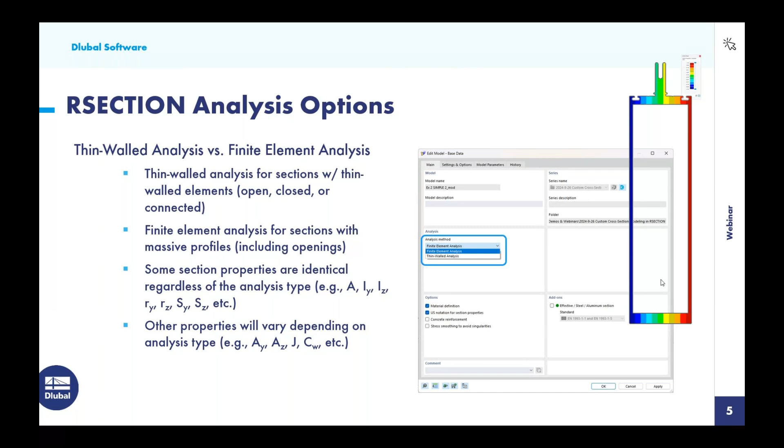Now, in addition to generating what we call the part, we are also required to generate what we call the elements. This will make more sense as we get into our example models today.

With these elements, we apply simplified assumptions and analytical formulas. The stress and force flow is considered along these simplified elements' lengths, but not their widths. So topics like the shear, torsional, and warping properties are going to reference those elements only - we're not able to take into consideration the full cross-section geometry here.

For example, we're going to simplify and maybe exclude the fillet radius for some of these cross-sections.

Now, this next point I really wanted to emphasize: when we generate these elements with this thin-walled analysis, and we bring it into RFEM for the full analysis and design, we are able to carry out the local buckling checks of these custom cross-sections according to the ADM standard, the AISI, and the CSA standards. This is something that is very unique to RSECTION in comparison to a lot of other competitor programs for calculating cross-section properties - again, we can take it this step further to carry out the local buckling.

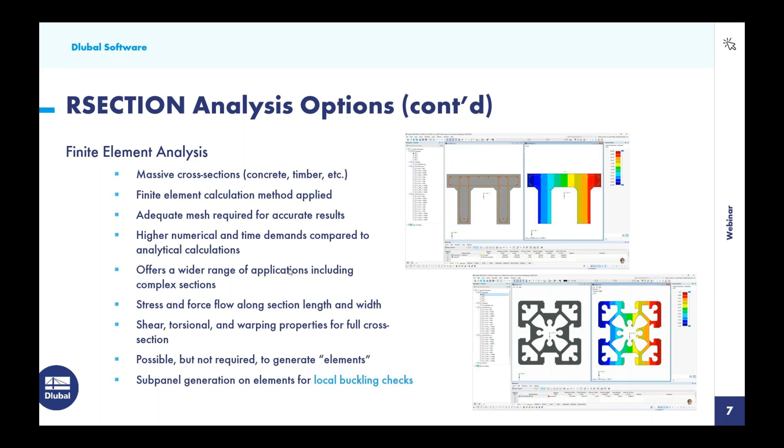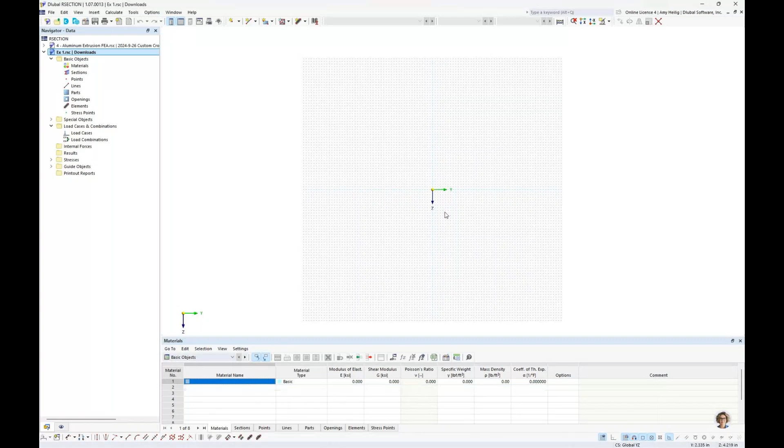So let us begin in RSECTION here. When we go to create a new model, we would give it a model name, and as mentioned in the PowerPoint, we would want to choose the analysis method. For this first example, this will be a built-up hot-rolled steel section that we will carry out according to the thin-walled analysis. Once we have input this information, for those of you familiar with our other program, RFEM 6, the interface looks almost identical. We have our navigator on the left, some tools at the top, modeling tools at the bottom, and a table to work with. Here at the graphical interface, we'll begin to create our cross-section.

I'm going to right click over in the navigator to create a new section. What we have here is the ability to access our cross-section library, so all the standardized sections from the various standards are included, as well as some parametric sections. We want to begin by accessing a W shape, and over on the left, we're going to use our filters to set this to the United States. We also set this to the AISC 16. We choose the W shapes here, and then we will scroll down to choose a W30 by 99.

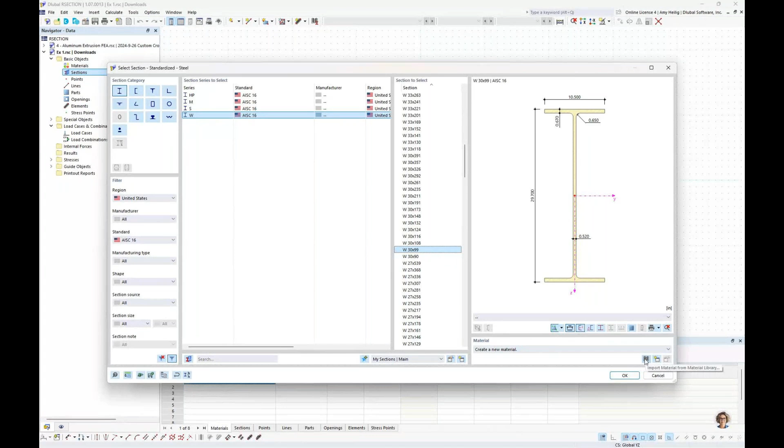Now we do want to assign the material to the cross-section, so very similar to the cross-section library, we're going to access our material library. Again, utilizing the filters on the left, we're going to choose steel, and then we can select the AISC 360, the latest 2022 standard. Here is where we can go ahead and choose the A992 material, so now this material is assigned to this cross-section. Once we have defined this particular section, we can choose a point here where we would like to insert it within our model. I'm going to take this top point and select it, and it's going to be automatically inserted here at the origin. I click OK, and now we see this standard W shape shown here.

Now we do want to add a channel cap to this.

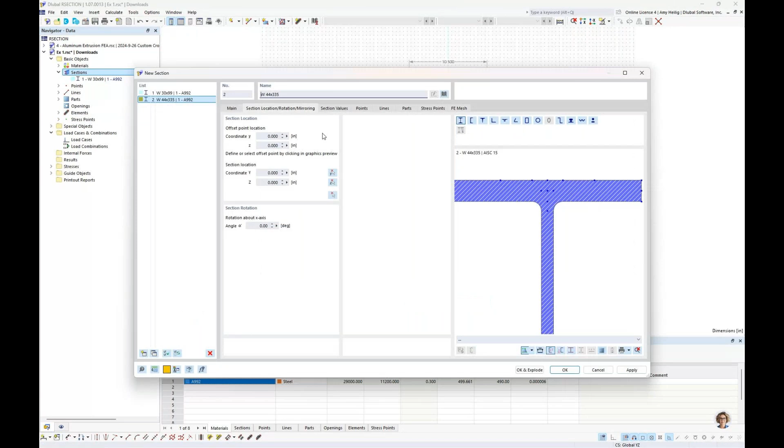So I'm going to once again right click to create a new section. We do have some quick sections we can access along over here on the right where I can choose a channel section. Once again, setting my filters to the United States, I'm going to choose the AISC. And then for my channel section, we will choose a 15 by 33.9.

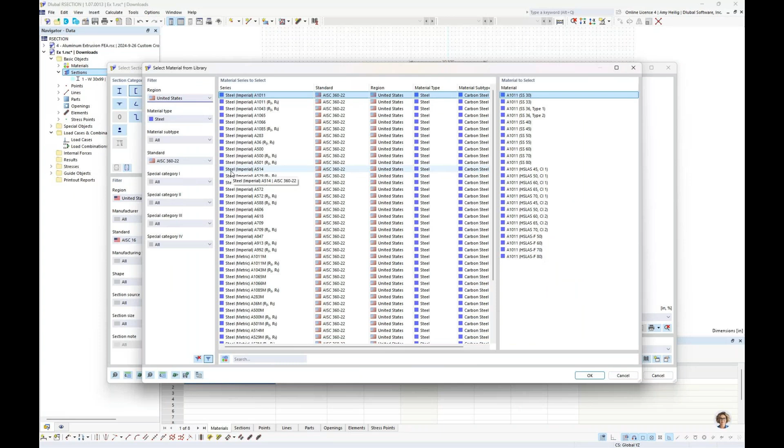We do want to assign a new material to it, so we're going to access our material library. This time we will choose an A36 material to assign to this particular cross section. We click OK. Now we want to rotate the cross section 90 degrees.

Again, I'm going to select a point here where I would like to insert in the model, not necessarily at the origin, but this time I'm just going to zoom in here and choose a point above the W shape. So when I click OK, we clearly need to move this cross section down to the top of the flange.

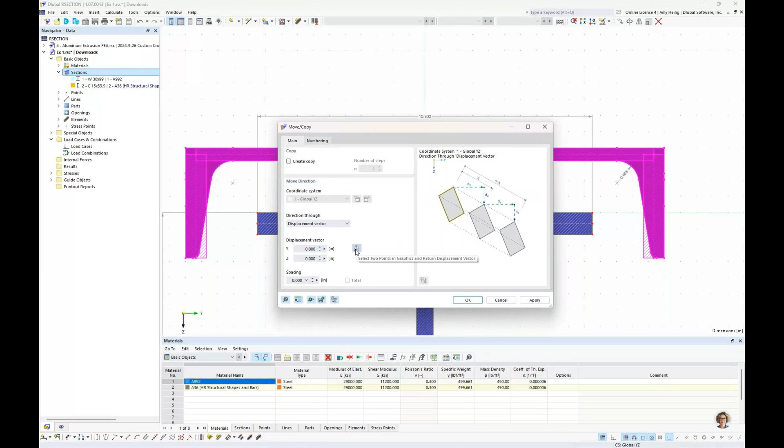We can easily do this by highlighting the cross section entirely, using our Move Copy tool. And I can graphically select my displacement vector by choosing 2 points. So I'll select here the point at the bottom of the channel, and then at the top of the flange will be my second click.

But I don't want to move this in the Y displacement direction, so we'll go ahead and set this back to 0. We're only going to move it vertically in the Z direction. And now we can see that these two cross sections align well for our built up section.

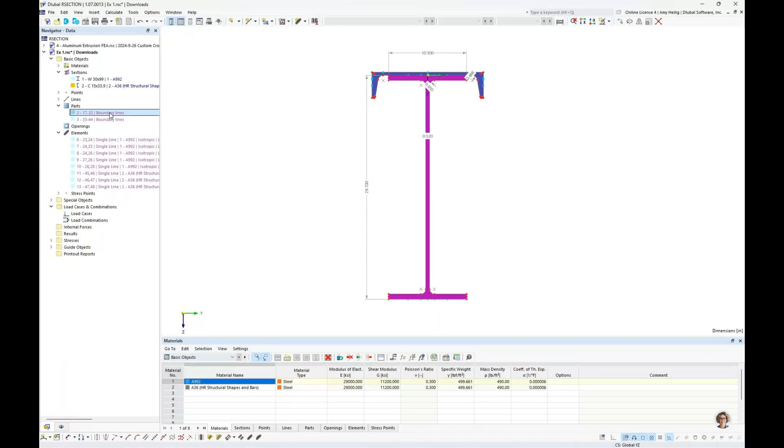So let us talk a little bit about the parts versus the elements. Because I have brought in this cross section from our section library, all of the parts and elements are automatically created here. I'll go ahead and hide the elements just to explain what we call the part. So the first part is our W shape, and we're just simply utilizing the boundary lines of this cross section, assigning the material to create that first part.

Our second part here is going to utilize the boundary lines of the channel, again, assigning that A36 material. Now, if we go ahead and graphically turn off the parts and turn back on our elements, again, these elements are automatically created and they are required when we run a thin-walled analysis. But again, you can see that all of them are listed here in our navigator.

Now, this is the information that would be taken into RFEM eventually and allows us to carry out those local buckling checks because we can tell which elements are supported at the edges, both edges versus just one edge. We know the thickness, we know the width of them, but you can see that there are some simplifications made with these elements. For example, we can't take into account the radius here of the channel or the radius here of our web to our flange connection.

But if the shape is close enough, then this should be sufficient for calculating the shear, warping, and torsional areas, and the thin-walled analysis would be preferred. But as the cross-section deviates further from the elements, this is where we would want to move to a finite element analysis.

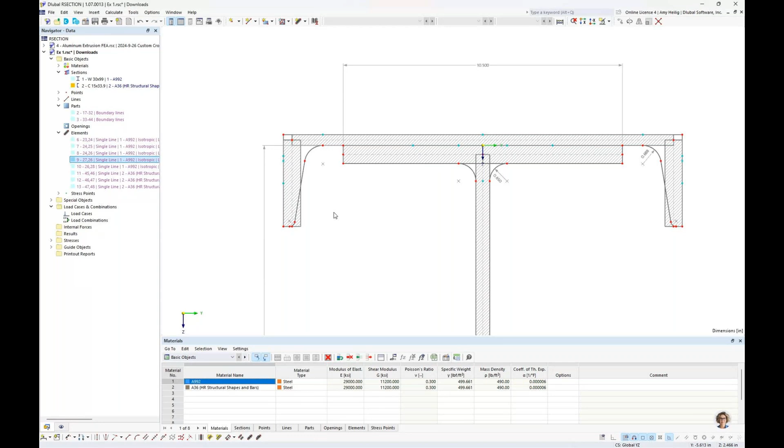Now, if I were to go and run the calculation, I go to calculate, calculate all, I get a warning. And it's telling me that I have several unconnected parts. So this is quite common within RSECTION.

And the reason why is because all of these elements here need to connect at their center point. And the issue is going to be this top element here with our channel just sitting on top of the top elements here for our flange. These are technically not connected.

So what we need to do is to create what we call a null element. Now, in order to make modifications to this cross section that I brought in, I need to select both of the sections in my navigator here. I can right click and I can choose the option to explode.

So now I can make manual modifications to these cross sections. Notice the elements I can now select individually. I'm also going to right click here to ensure that this auto connect lines and elements is turned on. As I draw elements, the program will automatically divide up additional elements that it intersects with.

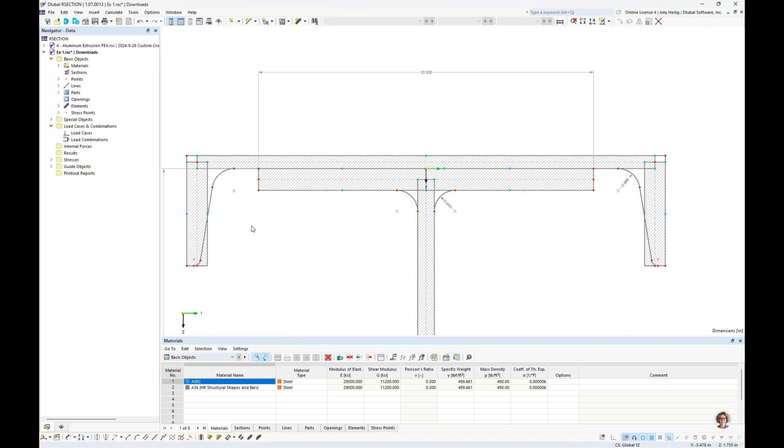So we're going to begin up here by drawing a new single element. Now, I don't want this element to have any thickness. It's a null element. So we can zero that out because I don't want to affect the cross-section properties. Rather, I'm going to define here the effective thickness for shear transfer.

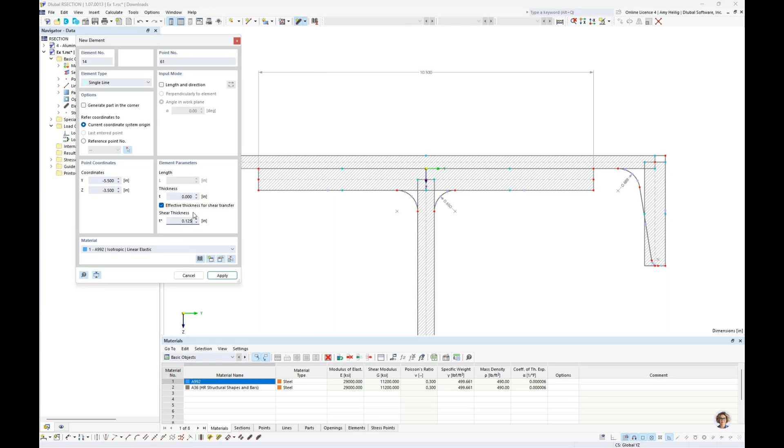We can set this to something equivalent to the thickness of the weld, for example, 0.125. We input that in, and then we can snap to that center point of the flange to the web of the channel here, right at the center point, and my null element is generated.

I right click once, and I want to do the exact same thing over here on the other side, snapping to the center point up here at the center of the channel element. Right clicking a couple times, you'll notice this element again was broken up where we added that additional null element. The null element can also be seen here in our navigator. Again, it's not adding anything to our cross-section properties; we're just connecting those elements with that shear transfer thickness.

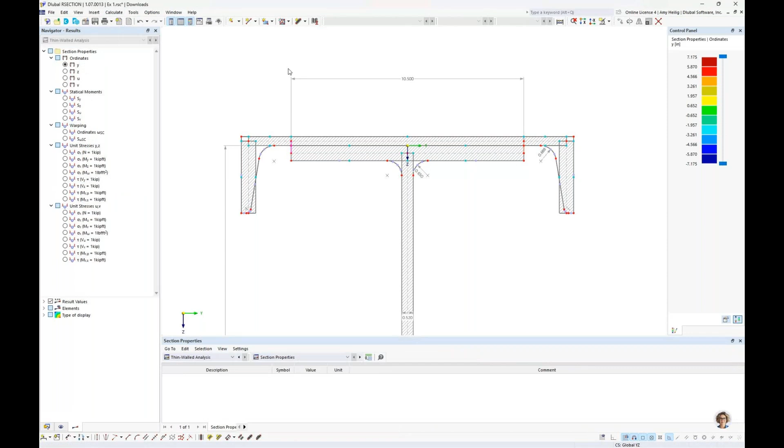So now we are ready to run the calculation. If we go to calculate all, we see how quickly that solves, with no warning messages. Ultimately what we're after here in our table results is the cross-section properties: area, moment of inertia, and some properties specific to the thin-walled analysis calculation like shear, torsion, and warping. This information is certainly what we need to also bring into RFEM.

We would want to save this file with the results by going to File, Save, or Save As. You need the saved results to bring this into the FEA program RFEM. But in addition to the table results for the cross-section properties, you'll notice some additional options to view graphically here.

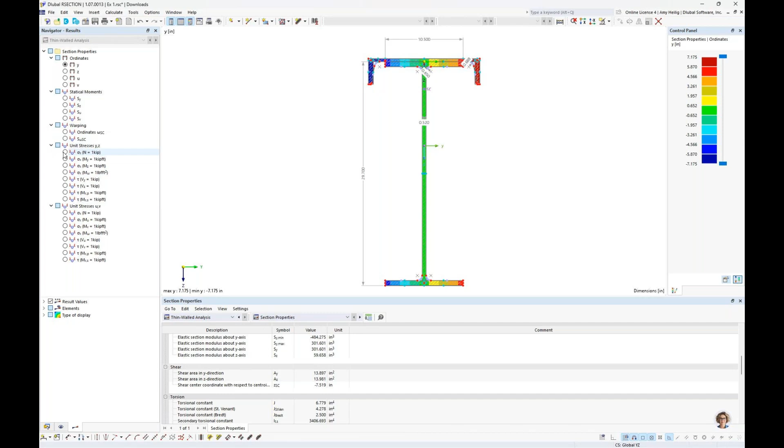The program will actually give you the stresses based on applied unit loads. For example, I can view the stress based on an applied axial force here to the entire face of this element based on 1 kip. We see 25.5 psi, or maybe I want to take a look at an applied bending moment of 1 kip-foot. Again, we can view the relevant stresses.

Now it also might be interesting for us to view the stresses on the cross section for loads other than this standard 1 kip or 1 kip-foot. We can also do that directly within RSECTION without bringing it to RFEM necessarily.

You'll notice over in our navigator that we have the ability to right click to create a new load case, and we can create as many load cases as we want. We could even generate a load combination with the relevant load factors. For today's example, I'll just give this a single load case name, load 1.

I click OK, and once we've created this load case, we can apply forces by right-clicking on the internal forces and selecting new internal forces. You'll see the relevant forces we can apply to this cross-section. For example, if we wanted to add a shear force of -10 kips, we put that in for VZ. If we wanted to apply a bending moment about the strong axis, we could put in 100 kip-feet.

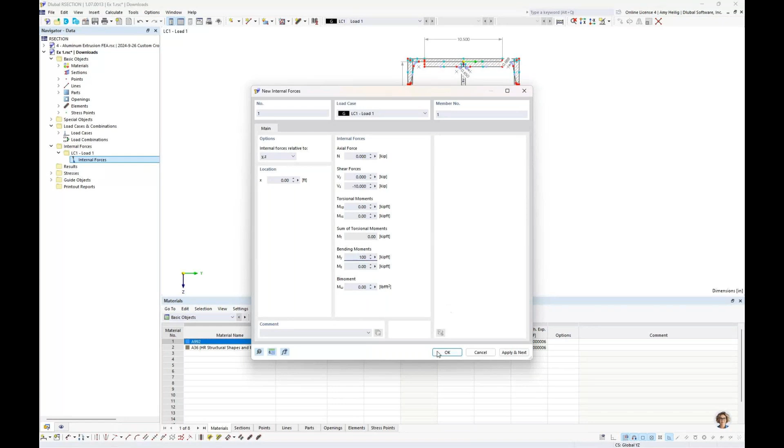So when we click OK, I can go back to calculate all. All of my cross-section properties, of course, remain unchanged, but now we get this additional option in our results shown at the bottom where we can view the normal stresses, shear stresses, or von Mises stresses, based on that applied shear and bending moment from load case 1.

All right, so that will conclude our first example for today. We now want to move on to our second example.

So for this one, I am going to jump over here to my AutoCAD file. I have this relevant cold-formed steel section shown here. Although the shape is a little bit more complex, you'll notice that the thickness of the wall is identical throughout. So this will certainly be very user-friendly to import into RSECTION because of this.

So we will go back to RSECTION here, and we're going to create a new file. We're going to give it a name, example 2, and we want to carry this out again according to the thin-walled analysis. We click OK, and once we have our model, we can additionally go to File, Import to directly import that DXF file.

So I'll go ahead and select the saved DXF file. We'll import into the active model, and now we get some additional options for what we want to do with this DXF file. Because this cross-section has a pretty uniform shape for the thickness, we can automatically create both the elements and the parts.

So let us go ahead and do this by selecting the second option here to create the elements automatically. We do need to put in the max thickness. This doesn't need to be the exact thickness, just a number anywhere greater than the thickness, because the program is intelligent enough to create the relevant element widths.

As far as the part, we do need to assign a new material. So we go into our material database, and instead of selecting from the AISC, we will select from the AISI standard. We'll go ahead and select this cold formed steel material listed first, the A1003-15. We see all the relevant submaterials as well. We'll go ahead and select the first option.

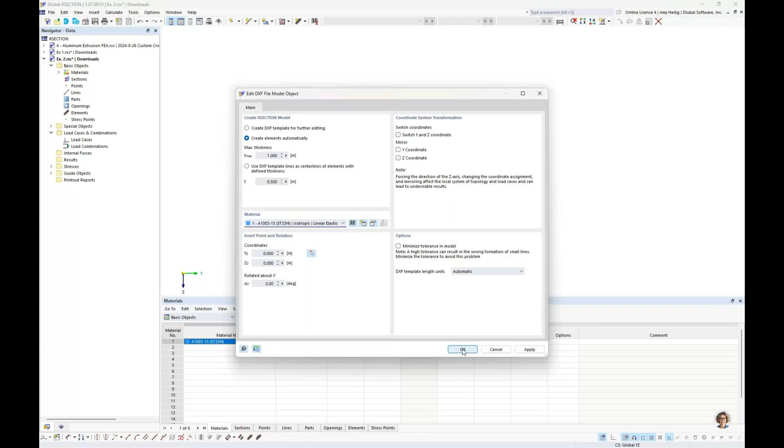So when we click OK, the program will go ahead and import that DXF file, and we'll see that everything is automatically created for us. So you'll notice here, if we expand the elements and the parts, everything was generated from that DXF file import.

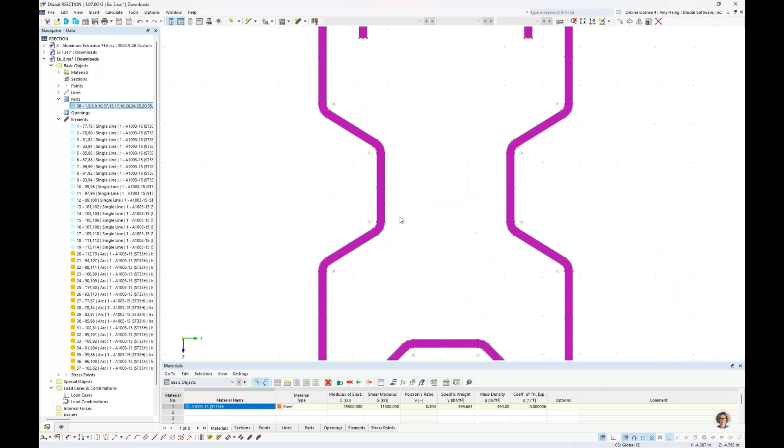So I'll go ahead and hide the elements for now. If we take a look at the single part that was created, the program just detects what the boundary lines are here. This part is absolutely needed no matter which analysis type we're selecting, because it's going to be used to calculate the cross-section properties like area and moment of inertia.

But then, because we are carrying out the thin-walled analysis, these additional elements are required. So I'll go ahead and turn off the part, and we'll turn on the elements. You'll notice that this was a pretty easy application, because the program is going to generate all of these elements automatically.

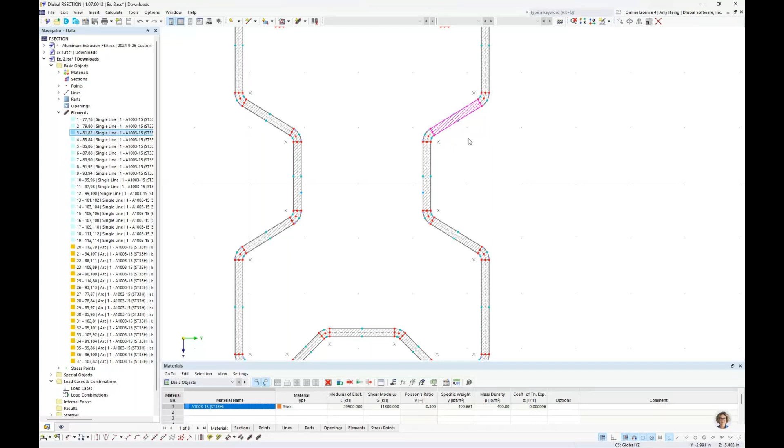This is what's going to be used for local buckling checks once we bring this into RFEM, to determine the length-to-thickness ratio, where these elements are supported at both edges, as opposed to this one up here that's only supported at one edge. You'll also see that we have the ability here to generate arc elements, so we're not restricted necessarily to just a straight segment.

So really, that's all that's needed for this particular section. If we go to calculate all, you'll notice that once again we have all of our cross-section properties given to us based on the thin-walled analysis within table format, as well as those unit stresses based on those applied unit loads. We would save these results, and then we could bring this over into RFEM.

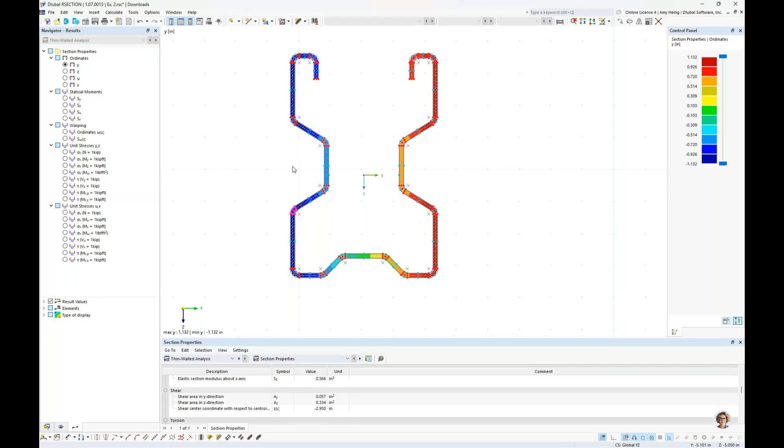So this cross-section was fairly easy with the DXF import. We'll now move on to our third example. For this example, I'll go back to the AutoCAD file here, and this is going to be for an aluminum extrusion. Now we see here it resembles pretty much a box section, but this certainly has some more complexities up here at the top than our last example.

A lot of these elements are going to be different thicknesses. We have notches, we kind of have these openings and grooves. So let us see how we can take this DXF file into RSECTION to still calculate the cross-section properties. So once again, we will go to File, New to create our third example.

Now, this analysis method is going to be set to the finite element analysis. I mentioned in the PowerPoint that although we would prefer the thin-walled analysis for something like an aluminum extrusion, at some point when the cross-section gets a little bit more complex, we do need to move to the finite element analysis. So this example will explain a little bit further why we will carry this out.

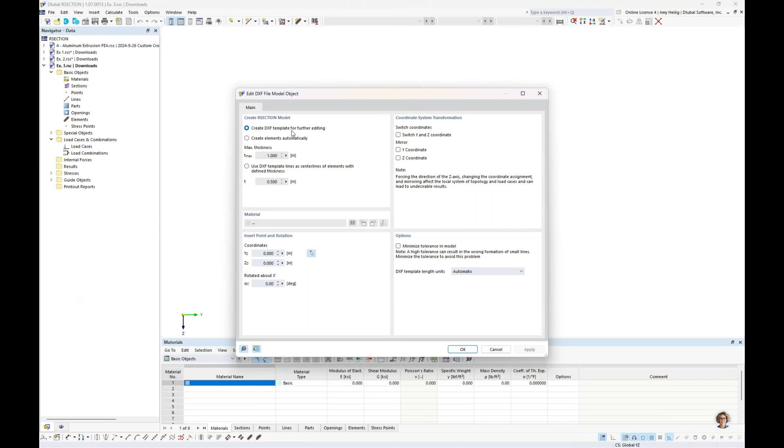So we click OK, and we're going to go to File, Import, to bring in the DXF file once again. We select this file from our computer. It's asking if I want to import it into the active model. Yes, we do. But this time I'm not going to create the elements and the parts automatically. It is possible, but the elements don't come in so nice because this cross-section is a little bit more complicated. So instead, we'll choose the DXF template for further editing, and I click OK.

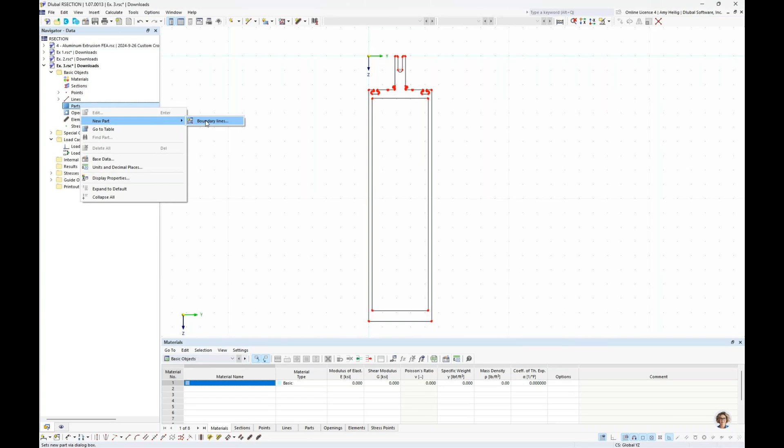So now what you'll see here is just simply the line elements from the AutoCAD file itself. Nothing was generated automatically. We see this over here in our navigator as well. Rather, we need to right-click to manually create our part, which we'll do by selecting the boundary lines. We want to create a new material here.

Once again, we access the material library, and we're going to choose aluminum and the ADM 2020 from our standard. All of the relevant materials are shown here, but we're going to jump down to the 6061 T6 for extrusions.

Once we have our material selected, we have the ability to select the boundary lines to create that part. You'll notice that I select all boundary lines here with my selection window. The problem is that if I try and click OK, the program's going to give me a warning.

It's looking for just one continuously closed loop of lines, and you'll notice that I've included all of the lines at the interior here for the opening. So what I need to do is deselect these line elements. I'll hold down my Shift key and highlight over all the interior lines, and notice they're no longer selected.

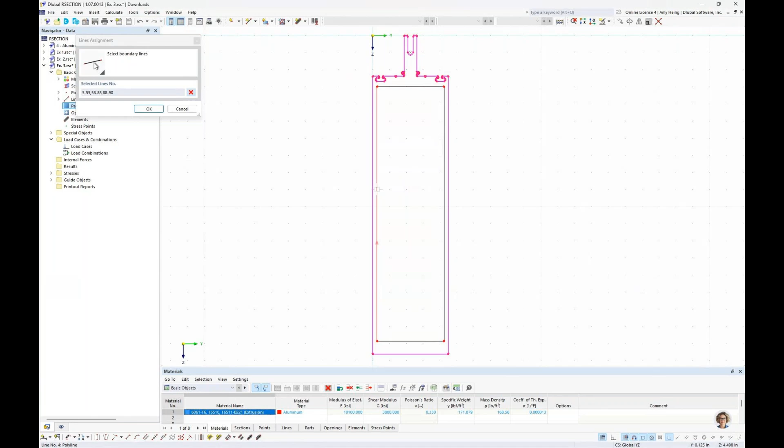I click OK through these dialog boxes and I have my part generated. But clearly we need to add an opening to this part.

We can do so by right-clicking in the navigator to add a new opening, or we have the drop-down feature up here at the top where I can simply select the boundary lines to create that opening. The program is intelligent enough to detect this closed loop, so that opening is automatically created, and now the part is generated.

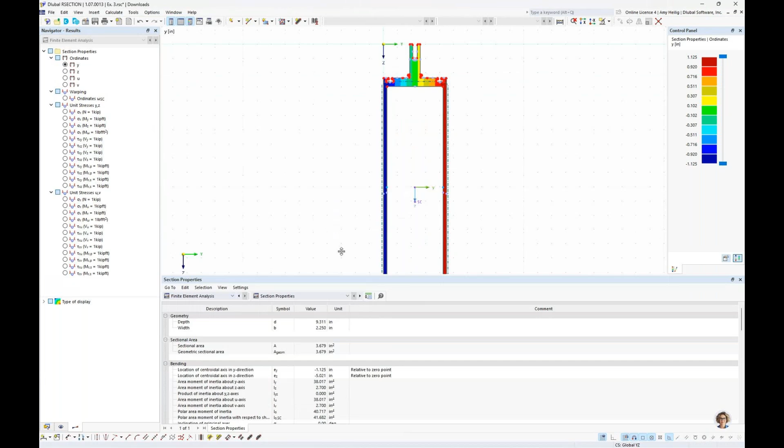Because we are running this finite element analysis, I can go to calculate all, and my cross-section properties are done. Remember that the shear, warping, and torsion properties are going to vary—they're going to be a little different than the thin-walled analysis now that we are carrying out an FEA.

The problem here, though, is that if I want to take this aluminum extrusion into RFEM, I have lost the ability to carry out local buckling checks because I have no elements defined in this model. So if we do want to consider local buckling, we would want to manually add in the elements to this cross-section as well. I'll begin by deleting the results, and go back to hiding the part graphically as well as the opening so that we're just seeing our lines brought in from AutoCAD.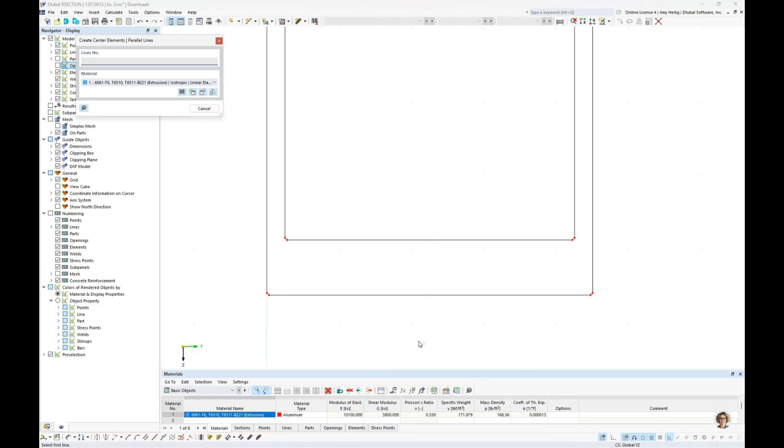Now we want to create these elements, and we have some really useful tools down here at the bottom, including this option to create the elements between parallel lines. When I choose this option, it allows me to graphically select two parallel lines, and you'll notice the element is automatically generated.

We do so for the sidewalls here, and then we go up to the top to do the same thing in a couple of areas, creating the element here as well as our vertical element up at the top.

Now clearly we need to clean up these elements. They should all be connecting at these center nodes, and they should be spanning across the full length of our section. This is quite easy with the move copy tool once again.

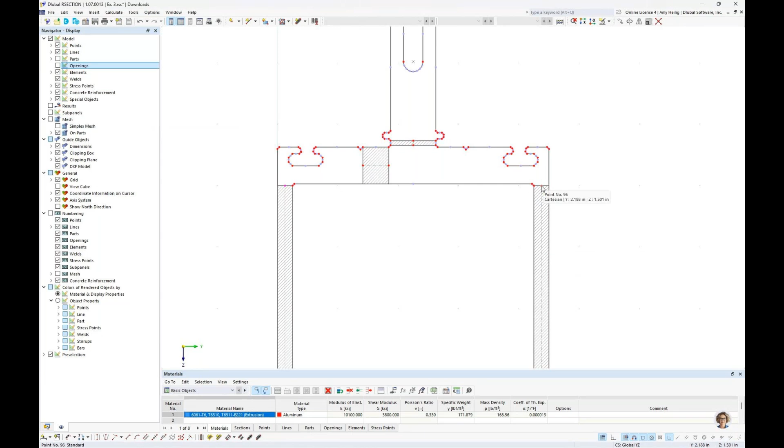I'm going to select both of these top center nodes of my side elements by holding down my Control key, so they're currently both highlighted. I'll use my move copy tool to utilize this displacement vector, choosing the option to click two points where I select the center point of this element to the center point of the horizontal element that it eventually should be connecting to.

But again, I don't want to move these elements in the Y direction, only the Z direction, so we'll go ahead and zero that out in the Y direction. Now you'll notice that these elements extend up to the center line of our horizontal element.

This now gives me the ability to simply grab this node and drag and drop it, and I can snap directly to that center node point. I'll do the same thing on the right-hand side.

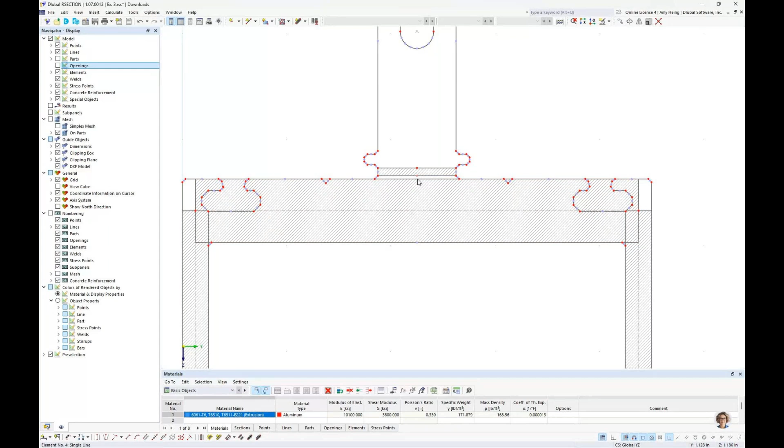And we also need to do the same thing for this small element here. We want to extend it up to the top as well as the center point here. So I'm just going to drag and drop it. The program snaps to that center point, and then up at the top, we want to snap it to where this arc begins.

Now there will be a problem here because, similar to our first example, notice this element is connected to this one, but we haven't divided this element here, so the program won't detect that these are connected. So what we can do is manually connect them with this tool up at the top to connect lines and elements. And if I highlight over this location, sure enough, we now get 3 elements at this intersection, and everything would be considered fully connected.

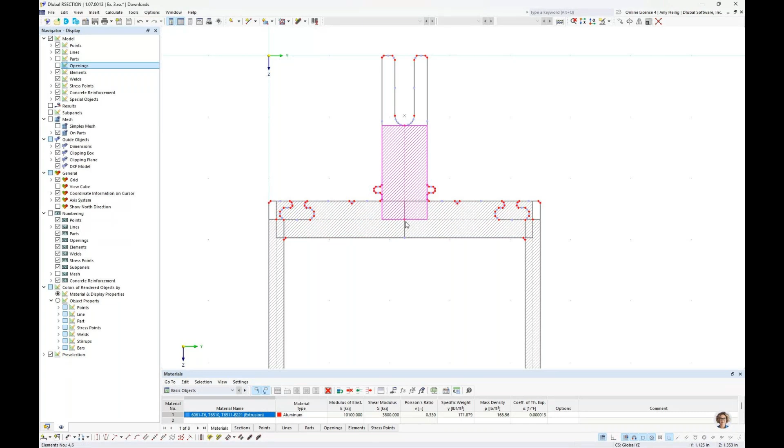But you'll notice that for the elements, we have to make these simplifications. For example, this opening here, we're not really accounting for with this element. But again, the cross-section properties for the finite element analysis only refer to the part, but we want to create these elements for the local buckling checks once we bring them into RFEM. So inevitably, some simplifications have to be made.

I also didn't draw elements up here at the top. Maybe I'm not so concerned with local buckling, but I certainly could draw them in here. And then again, we would want to draw in a null element to connect from this larger element to these smaller ones, like what we did in the first example.

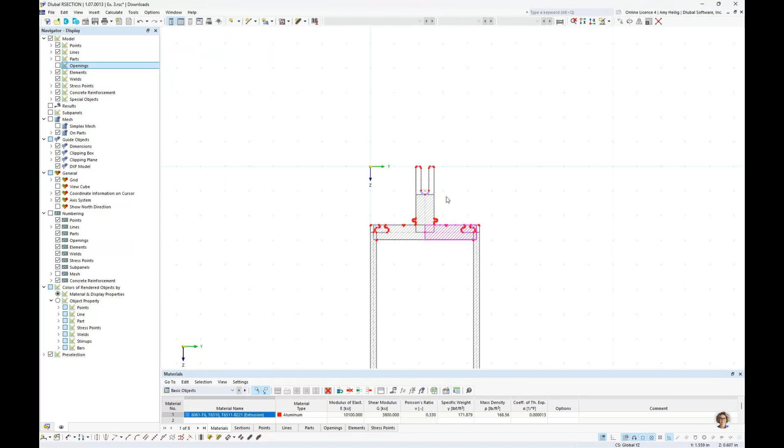Now down at the bottom, we have the same problem where I want to hold down my control key to select both of those nodes. I use my move copy tool. I graphically select my displacement vector by choosing 2 points. I don't want to move it in the y-axis, as we see here from our axes in the background, only in the vertical z direction. I click OK, and now I have the ability to grab this node and snap it to the center point, and I'm going to do the same thing on the right-hand side.

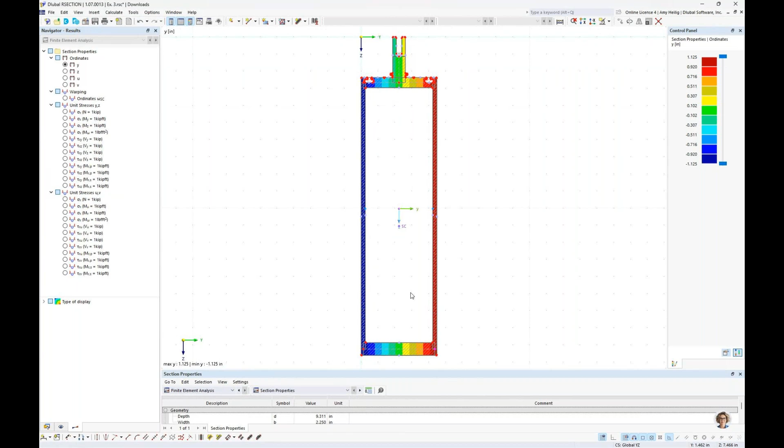So now that these elements are created, we can go to calculate all, but keep in mind that really the cross-section properties aren't going to change at all from what we saw before we drew the elements, because again, these elements have no influence when we're running the finite element analysis.

If we are curious, we could go back to the base data dialog box just to toggle to the thin-walled analysis to see what these results look like. And we can go to calculate all. So as we zoom in here, you'll notice that for properties such as shear, torsional, and warping, we're going to be neglecting some of these areas or simplifying some of these areas of the cross-section.

So again, as our cross-section tends to deviate, or the part tends to deviate from the elements that we can create, then we do need to move to that finite element analysis, but still with the ability to generate the elements for local buckling if we choose to do so. All right, so we'd probably toggle this back to finite element analysis, rerun, and save those results to our computer.

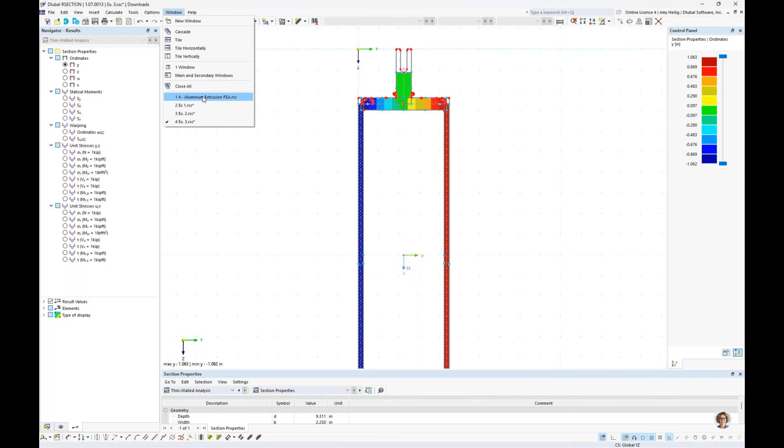The next example I actually already have pulled up here, so this one will be just a quick example. We mentioned it in the PowerPoint. We probably have some type of AutoCAD file for this one that we can easily just file, import. You'll notice that the part could be easily created here by selecting the outer boundary lines. Again, we'd want to add openings here for all of the openings, all 5 of them. And we certainly would want to run this particular cross-section according to the finite element analysis.

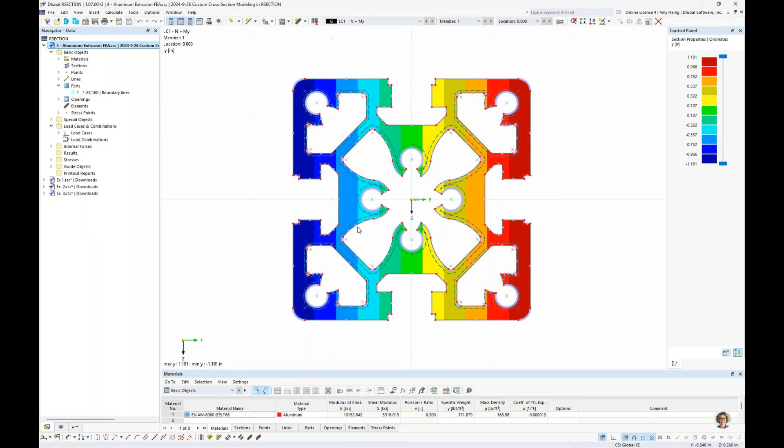If we toggled this to the thin-walled analysis and tried to generate those elements everywhere, it would be entirely too complex, and it really just doesn't make sense because, again, our elements are going to deviate away from the original shape. So by carrying out the finite element analysis, we get all of the properties shown in our results, as we can see here in table format, as well as those unit stresses.

We also might argue that it really isn't worthwhile inputting additional elements because local buckling maybe isn't a concern for a cross-section such as this one. So that one should be a very easy approach: importing in that DXF file, creating the part, and running the finite element analysis.

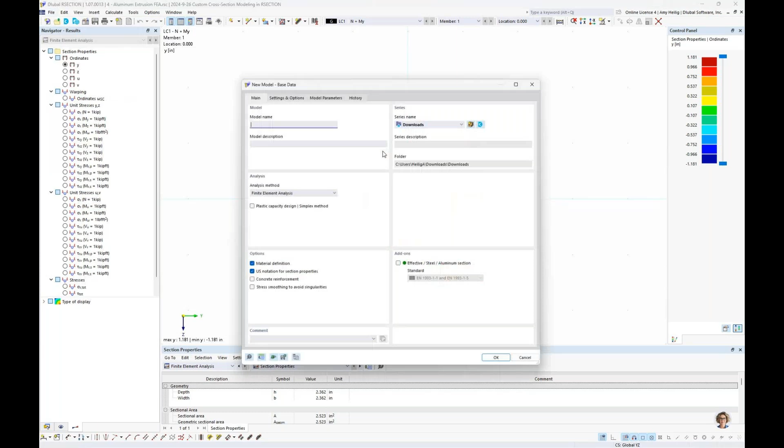Okay, so we want to move now to our 5th and final example within RSECTION. For this one, I'm going to go to File, New, and this will be example number 5. We will carry out the finite element analysis because we're going to create a custom reinforced concrete massive section.

Now, what's fairly new within RSECTION is that not only do we have the ability to calculate the cross-section properties here, but we can also place the reinforcement in these custom sections.

When we activate the concrete reinforcement, we get a new tab here where we can set the default cover. So we'll go ahead and modify this to 1 inch. When we click OK, similar to our previous examples, we are going to right-click here to create a new section. I'm going to access my section library.

Now, we easily could import in one of these massive sections, which is what we'll be doing today. Of course, you can import in an AutoCAD file for massive sections. You can draw your boundary lines up here in our toolbar and create your part manually. So a lot of different options.

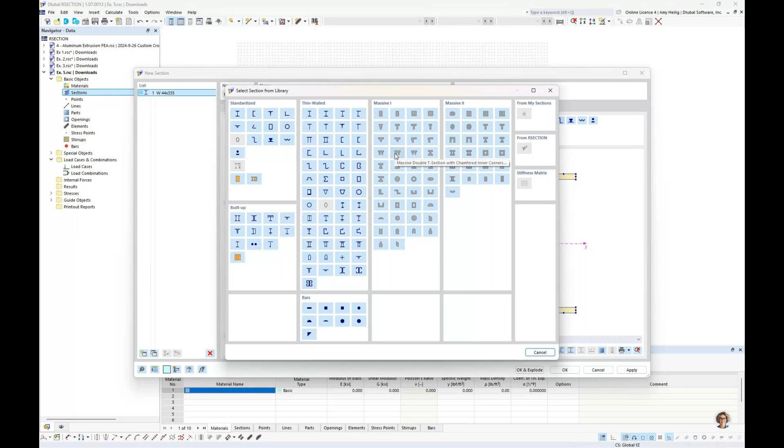But for today's example, I am going to select here from the library the massive double T section with chamfered inner corners. So with this cross section, we now have the ability here to just input in the dimensions and the program will automatically update. So we have some nice visualization here to show you exactly which dimensions you're setting.

I'll go ahead and modify here the depth to 30 inches. The width will be 45. We have a couple heights to set, that will be 8 inches and 8 inches, and then we're going to modify the chamfer dimensions to 2 inches and 2 inches, and finally the spacing between those rib elements, we'll set this to 24 inches. So again, the cross section will update automatically based on my input here.

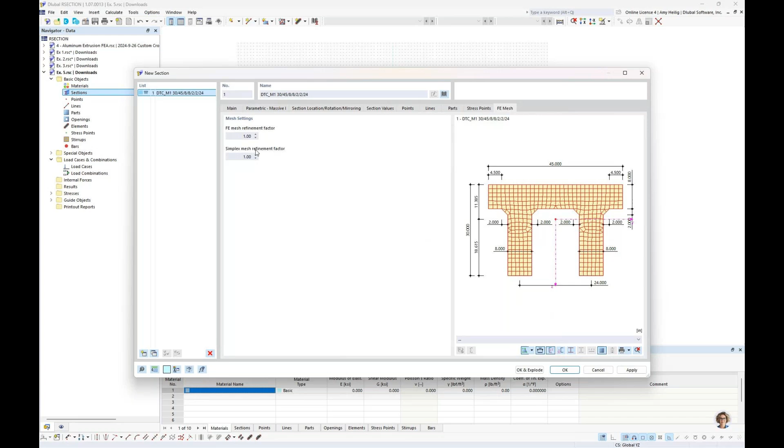If you do jump to this last tab, it's worth noting here that with that finite element analysis, we've added this FE mesh tab here. So you can see that the program automatically sets the FE mesh. It should be adequate, again, to get those adequate results. But if you'd like to refine it, it is possible to add in a mesh refinement factor.

Back under the main tab, we need to assign a material to this massive section. So we will visit our material library like we've done several times before, but we're going to choose concrete and we're going to choose the ACI 318-2019 standard to choose 4,000 PSI.

Now, if your concrete material is not shown in the library, we can always select one of the existing materials, come in and edit it, and select a user-defined material here to modify the compressive strength or any of the material properties. For today, we will just go ahead and utilize the 4,000 PSI.

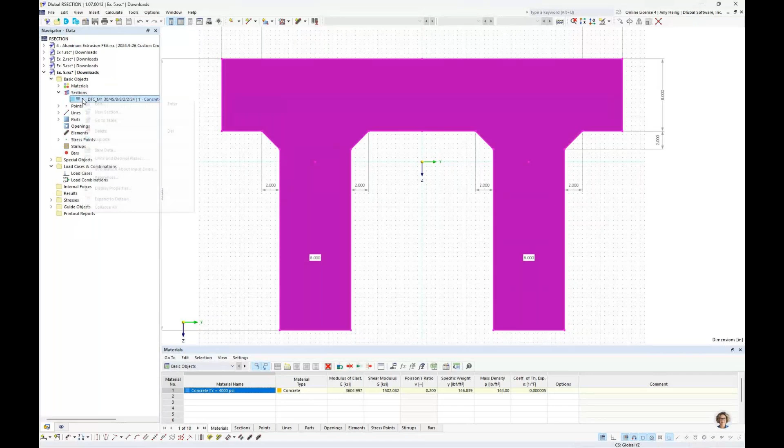So once we have set the material, the cross-section is brought in here into graphical view. Now, it is possible as well if we right-click to explode the section, we can add in additional openings such as a rectangle or a circle if we did, again, want to account for that with the cross-section property calculation. We'll go ahead and leave this without openings for today.

Now, the first step with our reinforcement is to define the stirrups. And because I've activated that under the base data, I have a couple different options here for my reinforcement. We're going to begin by right-clicking on stirrups to create a new definition.

We do need to set the material of the reinforcement steel. So we'll visit our library here. The program automatically sets this to reinforcing steel according to the ACI where we choose grade 60. The stirrup diameter is input here in inches. We'll choose a number 3 bar at 0.375 inches.

The stirrup diameter of curvature is also input. We can see this visualization picture over here on the right to see exactly what curvature we're setting. We'll go ahead and leave this as 1.5 inches.

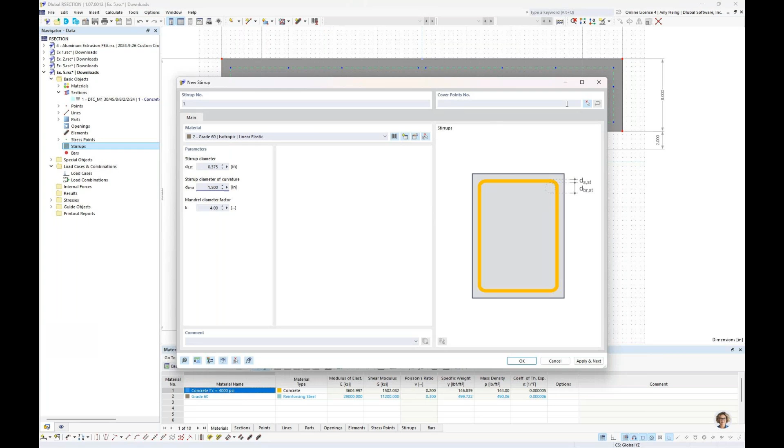And then we want to set the cover points. So the program has automatically created some helpful points here that we can easily snap to. So for our first stirrup, what I'm going to do is to select these 4 corner points here, but then I need to click a 5th time in order to close that loop. So when I click OK and I hit apply and next, I still remain within this dialog box, but you will notice here that that first stirrup was generated.

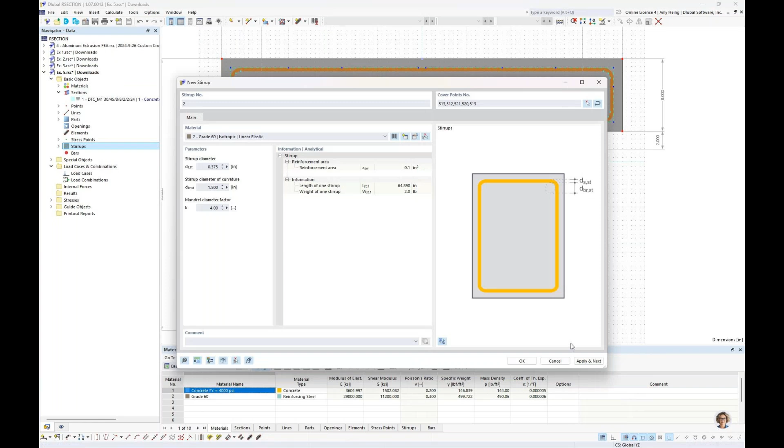All of my information was remembered from my previous input, so I can now place my second stirrup by clicking on the 4 vertical points and a 5th time to close the loop. I click OK, hit apply and next, and we see that stirrup generated in the background. We'll do the same on the right side, clicking the 4 points plus a 5th click to close the loop, then click OK twice.

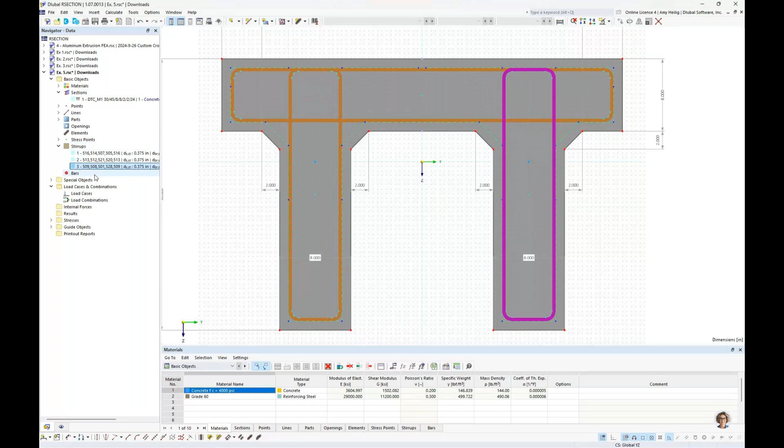So now these stirrups are generated. We can select them here and edit them easily within our navigator. It's now time to define our longitudinal reinforcement.

Right below the stirrup input, we can right click to create a new bar. Within this dialog box, you'll notice several different definition types. We'll move through these and they'll make more sense with our example model today. We also have the ability to define reinforcement layers.

You might be wondering, why wouldn't we just put everything in one layer? Well, when we bring this into RFEM, if we've defined different layers for our different reinforcement input, we have the ability to modify the lengths differently for each layer. We'll do this in our example today, so I want to create some additional layers.

We'll rename the first layer to top, then make a copy — our second layer will be bottom. Make a copy again, this will be bottom additional. Finally, our fourth layer will be sides. Once I create these layers, I can select them within my dropdown.

We'll begin first with the top layer. My definition type is going to be a single rebar defined by a point. I want to modify the bar diameter to select number 5, so I'll input a dimension of 0.625 inches for the diameter. Then I can graphically select the point where I'd like to place this longitudinal bar.

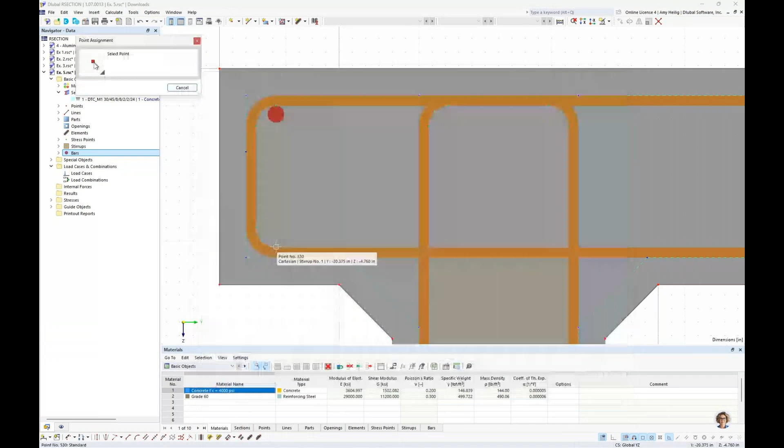So we select our point in the upper left corner, hit apply and next, and we see that inserted in the background. I'll do the same at the bottom, apply and next, then over on the right hand side at these two locations, apply and next, and my fourth click will be at the bottom right. Now I click OK.

So we see those 4 bars inserted at the top of our section, and they're also listed in our navigator. We're going to right click to create a new bar definition again, still part of the top reinforcement. This time we want to select the option for multi-uniform.

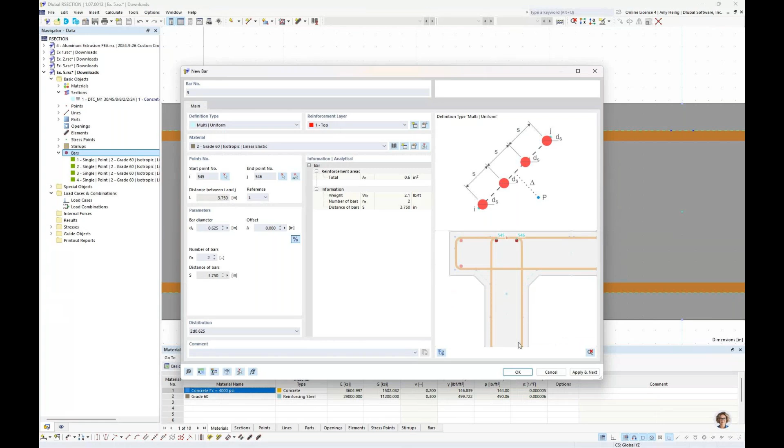The program still remembers my previous bar diameter input. I want a total number of 2 bars, and then I select the 2 points these bars should span between. I'll select my point inside my vertical stirrup, and I can see a nice preview shown within this dialog box. I click OK, and now those 2 rebars are shown.

Now, instead of the apply and next option, we also have the ability to work within the table. If I jump to the bars tab, here's all my input for my longitudinal reinforcement, where I can take this last input, right click, and copy the row. So all the information I input for these 2 bars up here is copied, and then I can just graphically select my 2 points where this copy should be located — I select the vertical reinforcement over on the right, and that's simply what's needed.

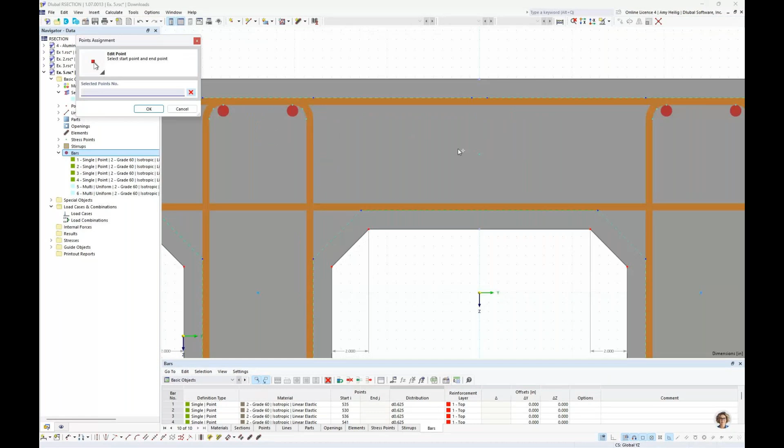So it's up to you and your preference how you'd like to input that reinforcement. We are going to create our final reinforcement for that top layer. We'll go once again to the reinforcement layer type 1 top. The definition type is going to be multivariable this time, with the same bar diameter, but we want to increase this to a total of 5 bars. I'm going to graphically select, again, my 2 points these bars should span between — choosing the point on the left here and the point on the right.

And once we've input these, we need to specify how the spacing will vary along this length. The spacing from my first point to my first bar, I'm going to decrease by 1. I want a total number of 4 bars here. I'm going to set this distance to 1.5 inches. My second input is going to be 5.75 inches, and then the program's intelligent enough to recognize that the last dimension should be 1.5 because we know the total length between these 2 points.

Once we have input this information, again we see the visibility here of what this will look like. We click OK, and it's applied to our cross-section.

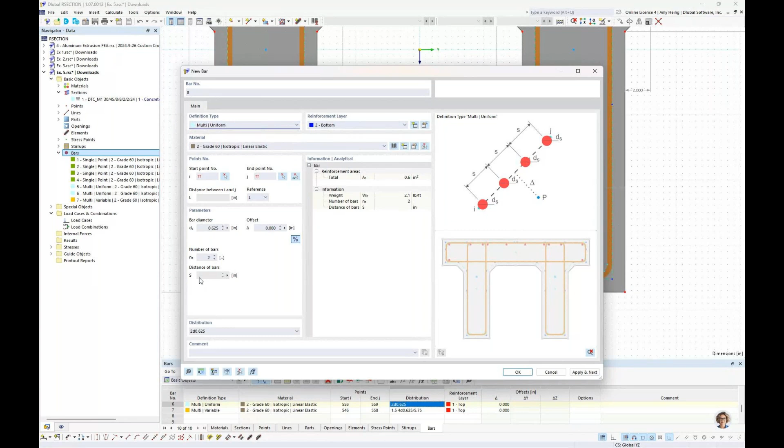Moving on to the bottom reinforcement, I am going to right-click to create this new definition type, but this time we want to toggle to a different layer, bottom. This one is going to be multi-uniform, so we want uniform spacing for these bars. We want a total number of 2 bars. As far as my points, I'm going to graphically select these down here at the bottom.

I'm going to hit apply and next because rather than the table option, I can easily select here just the next 2 points on the right hand side. I click OK, and now we see that bottom reinforcement.

Moving on to the bottom additional reinforcement, we create a new definition type, but now we toggle to layer number 3. With layer number 3, we want to keep this as multi-uniform as well. We want to increase this to a total of 3 bars.

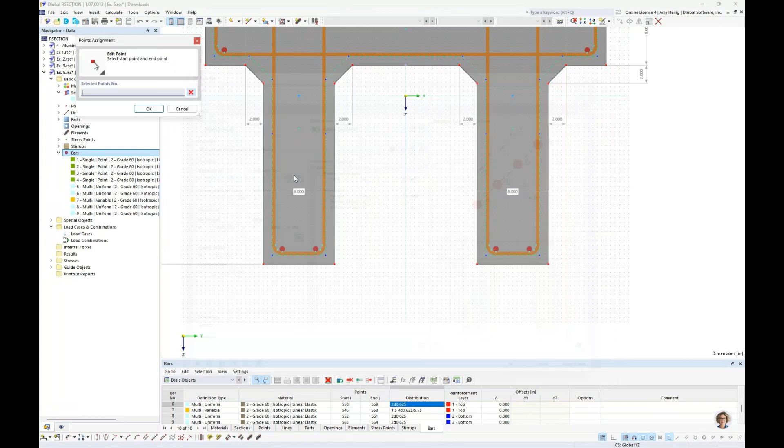I'm going to select my points here, the bottom left. So my first point is over here on the left. My second click is going to be my point on the right that I would like these 3 bars to span. But you can see that we have a bit of a conflict here where these bars are now overlapping.

So this is why we also give you the ability here to set a vertical offset. I can go ahead and input 1 inch, and now we see those bars move in the upward direction so that we don't have any overlap to our bottom bars.

I'm going to hit apply and next, and I'm going to do this exact same thing over on the right hand side by clicking my 2 points here. Everything's remembered from my previous input, so we can see here the additional bottom reinforcement.

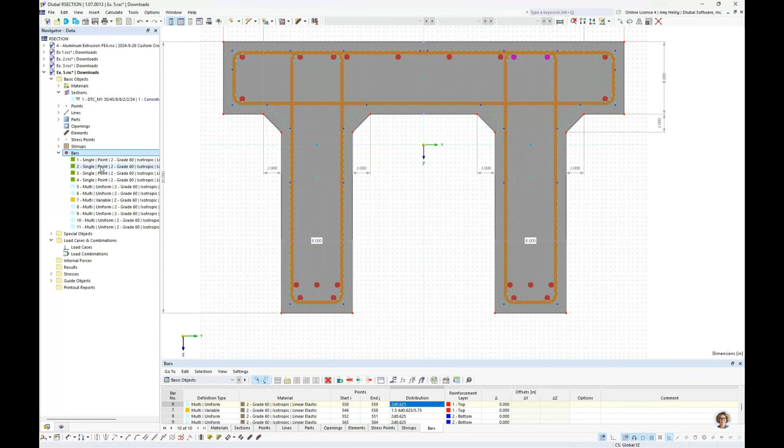We're finally ready to input the last reinforcement. This is going to be for our side layer. For the last time, we go here to a new bar, and we're going to choose the layer type for sides. This one is going to be multivariable because I do want the spacing to vary. We want a total number of 5 bars here, and I am going to decrease the diameter.

Maybe we want to use something smaller for the side reinforcement, like number 3s, so we'll just use 0.375. Then I also want to zero out the offset. The program remembers that from my input last time, so we'll go ahead and zero that out.

And then I graphically select the 2 points here along the side. We're going to click once up here at the top and once down here at the bottom. Then I want to input the specific spacing between these bars. Remember, this first input is going to be from this first point to the center of my first bar, and that's going to be 0.

The additional spacing here is going to be between the interior bars, so this will be uniform spacing of 5.75. Again, the program is intelligent enough to detect this final dimension. We get a nice preview here shown in our dialog box.

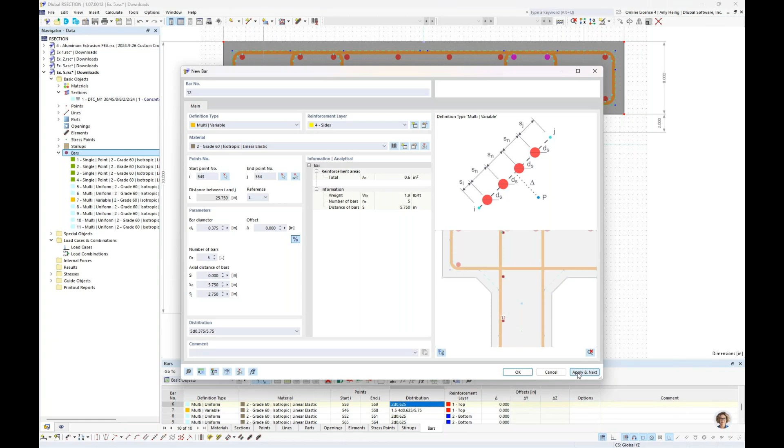If we hit apply and next, I can graphically select the points on the right hand side. I hit apply and next. I'm going to do this again over on the right hand stirrup in both vertical directions, apply and next, and then I'm going to go ahead and do this one last time.

Okay, so once we click OK, we now see all of our reinforcement drawn in this section. This is taking advantage of those different layer options, the different longitudinal bar input options.

Now we can finally go to calculate all. The cross-section properties, just like our previous examples, are available to us. Keep in mind that the reinforcement is not influencing these cross-section properties. Rather, we're going to use the reinforcement once we go into RFEM for the concrete member design. But we would want to save these results to our computer, and we're now ready to finally go into RFEM.

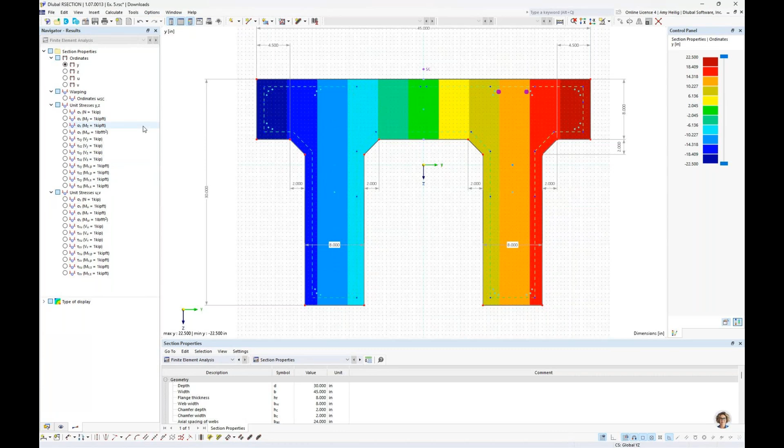To integrate these cross sections into bigger member models or full structure models, I'll go ahead and jump to RFEM here, where for the sake of time, I have already drawn a couple beams that we will cover. For those of you that have not been in RFEM before, the interface is almost identical to RSECTION. We have the navigator on the left with all of our input data, our tools up at the top, or we can work with our table. What you'll notice is I did create a couple beam members here utilizing our RSECTION files.

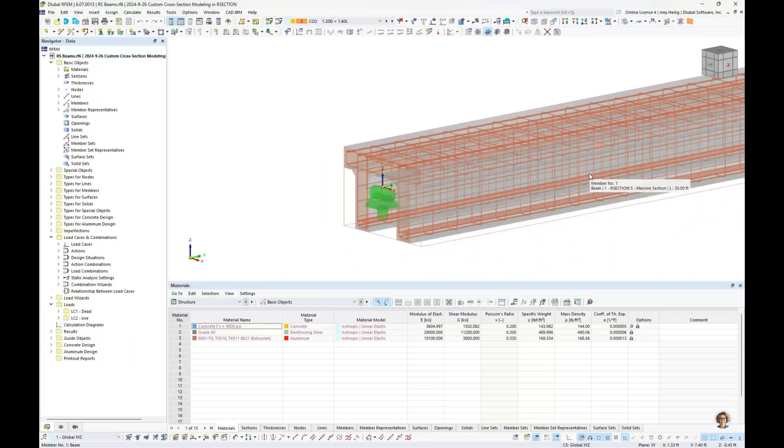We've applied a couple support conditions to the ends, but if we double click on this member, you will recall the 4 different layers. Well, here they are under the longitudinal reinforcement tab, where I can go ahead and cycle through each one of these, and you'll notice they're highlighted graphically. This now allows me to modify the length for the different layer types.

For example, we have our additional bottom reinforcement. We can see a nice preview here as well over on the right-hand side. If I didn't want this to span the full length of the member, we can modify this to something like 20% to 80%. I click apply, and now we should see that that reinforcement here was shortened to just the interior of the beam. So again, this is the benefit of utilizing those different layer options.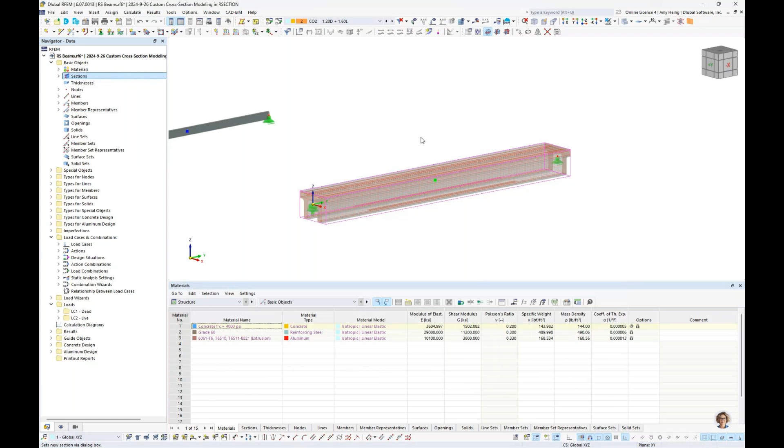We'll also see here that I did want to mention is how do we pull in this cross section? This can actually be done within a new RFEM model. We can right click to create a new section, or as we draw a member, we can do so. You'll notice here that for my massive section that was brought in, we accessed the cross-section library that again looks very similar to RSECTION, but this time we can import in from the RSECTION program directly.

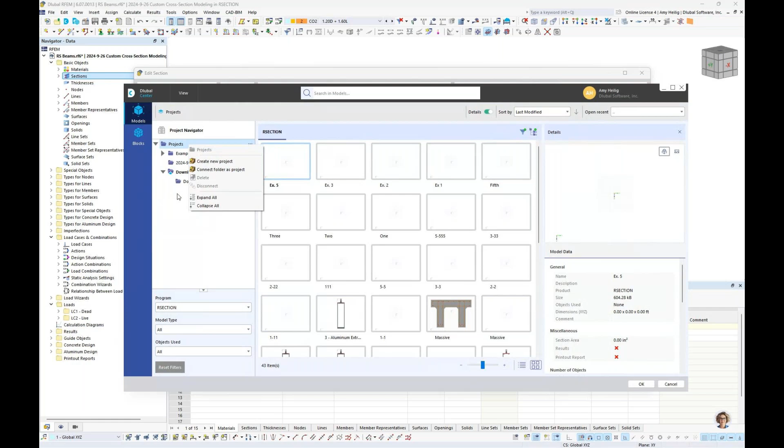If I were to click on this, this takes me to the Dlubal Center, where I would want to right click here to maybe connect a folder as a project under the existing project folder. And then here are all of my example files for today. So when we bring in any one of these cross sections here, what you'll notice is that the material is automatically considered. That FE mesh that we talked about is also brought in. So this is the big benefit here of creating those custom cross sections and integrating from RSECTION into RFEM.

If we jump down to the aluminum extrusion, which I'll go ahead and cancel out of here to show this member, again, we get a nice rendered section here, and I'll go ahead and turn off the types for nodes so we can see this cross section in more detail. But this is also a unique benefit of our programs, is that you will see the rendered section just like what we had in the AutoCAD file. So this is nice in knowing how to orient the member, strong versus weak axis.

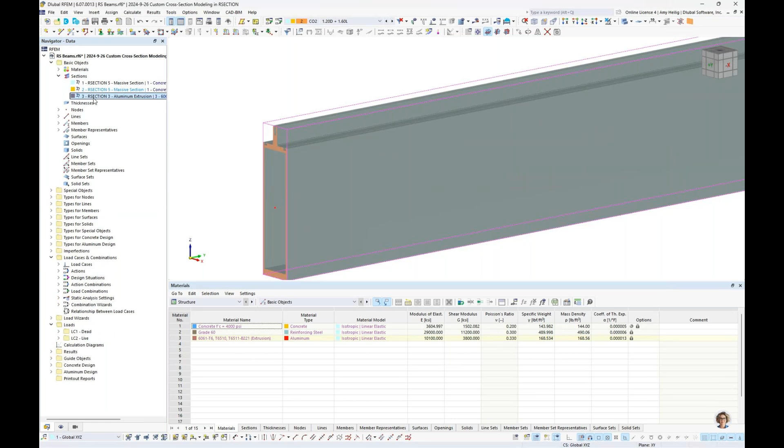Going back to the sections here, and I want to pull up this particular cross-section that again was brought in from the cross-section library directly from RSECTION. You can see the material again was also brought in, but we can modify that here by visiting our material library. But important for these sections that we have added elements. Remember, this was carried out according to a finite element analysis, but because we took that additional step to apply the elements here, now you're going to see each one of those listed within RFEM. And we tell you exactly how these elements are supported, either one side or both sides. We know the width, we know the thickness, and this will be eventually used in the ADM model.

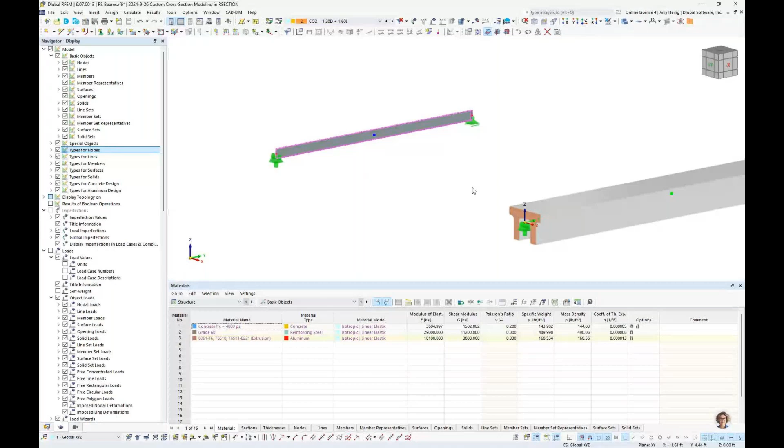Okay, so now that we have imported these couple members here, we would want to apply loads. Go ahead and turn off the reinforcement here for our member. I created just a couple simple load cases for today.

Dead load with an applied member load, and we also have a live load. When we combine these into the load combinations, you can see here that they will both be applied to the member based on ASCE 7 or NBC, however we're generating those load combinations.

RFEM is the program responsible for the full analysis. So once we bring this cross-section into RFEM, we can apply the loads and get information like deformations, support reactions, and internal forces. Again, this is all included in the base program, RFEM.

But if we wanted to take it a step further and actually design these members, so for example, design our aluminum member according to the ADM or our concrete member according to the ACI or the CSA standard, we would need to activate these add-ons.

So we go to the base data here, and under the second tab are the relevant add-ons that we have purchased with our RFEM license. So by activating here the concrete and aluminum design, we're not only going to carry out the analysis, but we'll further carry out the design for these two material types.

And under the third tab is where we can set the relevant standards. So for example, concrete design, we can select the ACI 318 or the CSA standard. Aluminum design, we can select here the ADM. We can generate our load combinations automatically according to the ASCE 7 or the NBC.

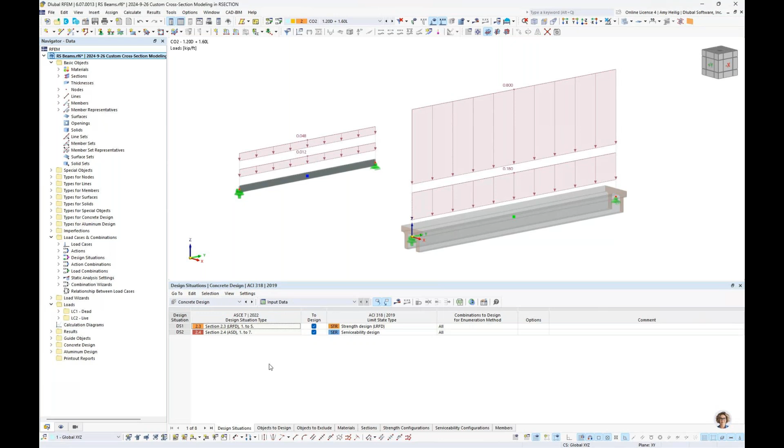So once we've activated these add-ons, we would input the relevant limit state types within table format for these add-ons. We would tell the program which objects to design. And ultimately, we can run the calculation.

So if I go to calculate all, the program will go ahead and run through the load cases and the load combinations according to a second order analysis. But then you'll see that we will take advantage of those add-ons to further design the members.

So once we're done with this calculation, we'll see over here in our navigator, very similar to RSECTION under our results tab here, we can view these static analysis results. So again, with the static analysis that comes from the base program RFEM, we can view the global deformations.

I can turn this into a wireframe view. We can view the member internal forces like axial forces, shear, or maybe bending moments. If we want to view just the aluminum member here, we can create a visibility so that the bending moment diagram is a little bit bigger.

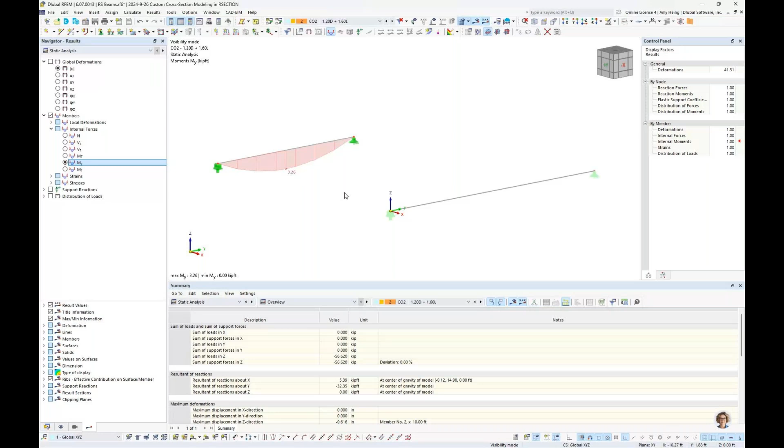So again, this is the analysis portion, but then we want to toggle down to the concrete design. You can see here the table also updates to the concrete design add-on, and essentially what we're doing here is designing this concrete member according to the ACI standard.

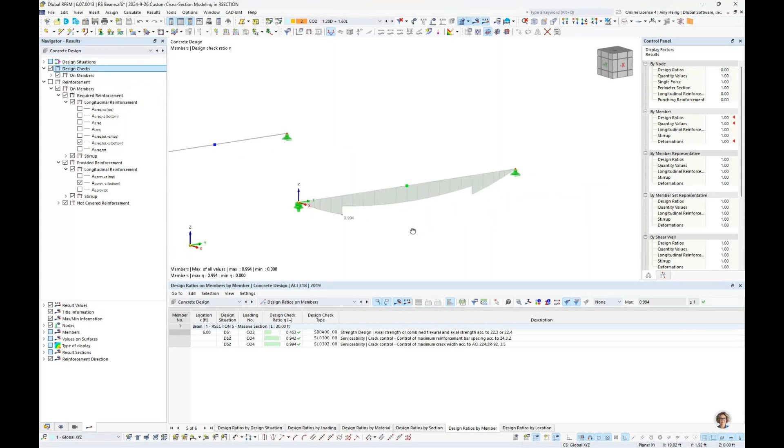Now, at the current time, for members or cross sections that are brought in from RSECTION, we will only carry out the single strength design check for axial strength or combined flexural and axial strength. So we are working on additional checks for these custom cross sections, considering the custom reinforced layout, like shear, or perhaps moving to serviceability, we'll recalculate deflections based on the modified stiffness of the cross section as well. But for now, this is the only strength design check available.

We also can carry out the serviceability crack control checks. But if we jump to the design check ratio here for this particular cross section, you will notice that if I zoom in here into the design check details, I see all of the relevant formulas, equations from the ACI, and ultimately the design ratio.

We also can activate here the interaction diagram. This interaction diagram is going to show us, in 3 dimensions here, the interaction, in terms of the table format as well, exactly where we're at for this particular custom cross section.

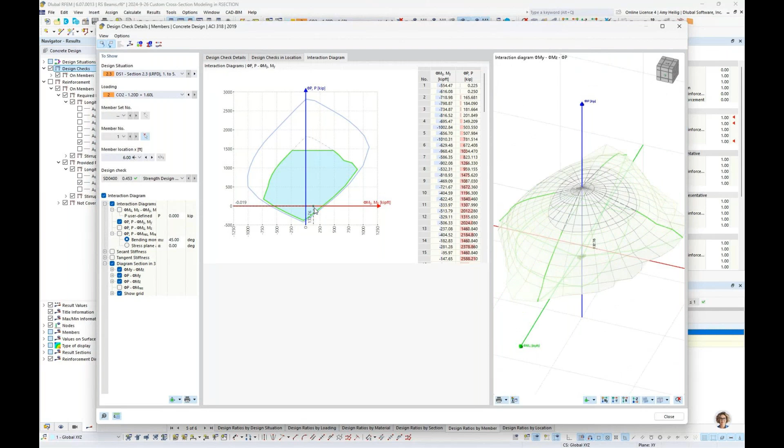If we're interested, we can also access the stresses on the diagram. So this cross section, as you can see here, will go ahead and bring in the reinforcement from our section where we can see the stresses on this custom reinforcement layout as well. Again, this is based on the applied loads at this particular X location for this design check.

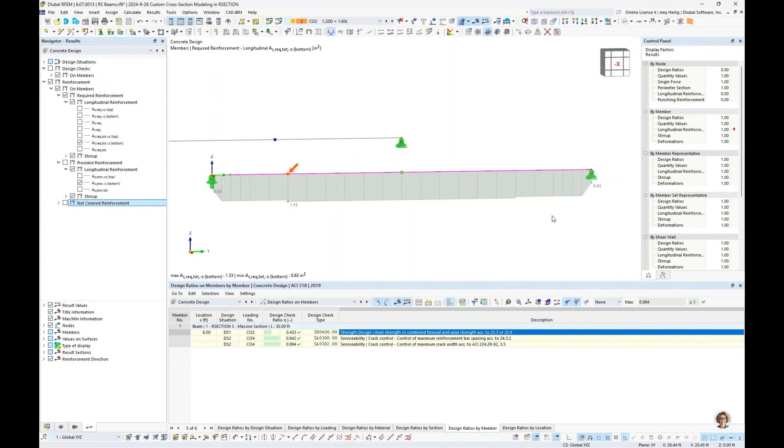Now, graphically, we can view additional information. So for example, we're currently viewing the design check ratio, but what we'd like to activate here is maybe the required reinforcement along the length of the member at the bottom, just based from the analysis only from those applied member loads.

Well, we can overlay on top of this the provided reinforcement at the bottom. And remember, we shortened that additional reinforcement to the center of the beam only, so that's why we see a jump here. But ultimately, the provided reinforcement should be greater than the required reinforcement. Sure enough, it is, so everything seems to check out for this particular member and this design check.

Now, very similar, we can toggle here to the aluminum design, so we're jumping now to the ADM standard. Unlike concrete, for anything with hot rolled steel, cold formed steel, or aluminum, we will carry out all design checks for these custom sections. There are no limitations with this. We design them according to general members, so the results for our ADM will show all of the various design checks.

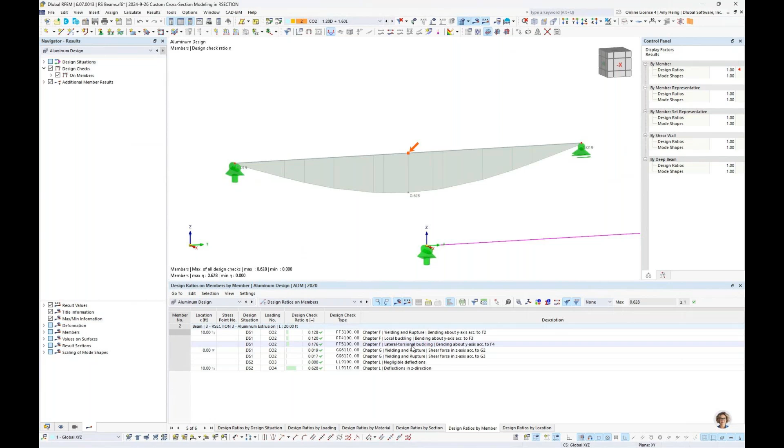For example, I have lateral torsional buckling, where we actually show you the buckling mode shape based on an eigenvalue analysis. But what I've emphasized many times before is you will see here the local buckling check for this custom extrusion. Let's go into the design check details, and I'll scroll in here so you can see the formulas from the ADM, the design ratio.

If we expand the table over here, we can see each one of these elements that we defined back in our section. We see how it's supported, either at both edges or one edge. If it's in compression, we'll classify it according to chapter B. Again, the really powerful thing the program will do for ADM, AISI, and CSA standards is those local buckling checks. We can also access the cross-section profile here to view the stresses, such as the von Mises stresses under the applied load for this custom section.

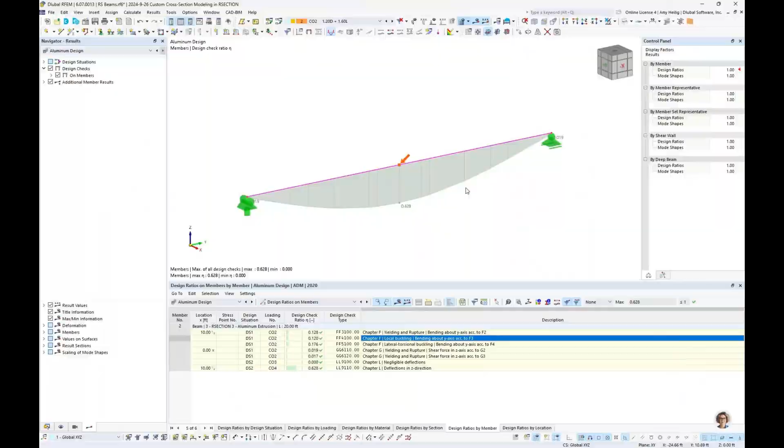Okay, so we will jump back to the PowerPoint for today to conclude our presentation.